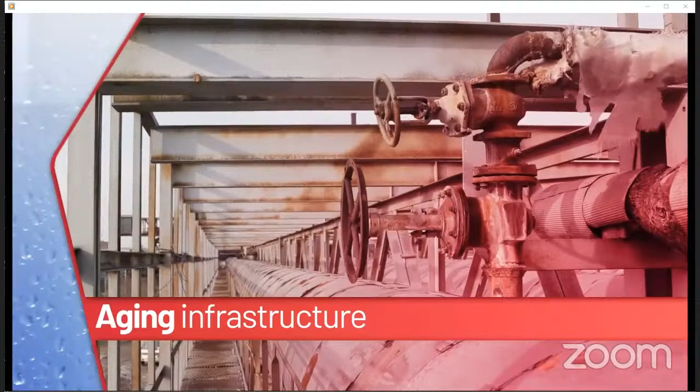The average utility loses 16% of its water supply annually. But that's just one of your challenges. Rising population is putting increasing demands on your utility's capacity limits. Extreme weather tests the resilience and sustainability of your system. Population growth and climate change escalate the importance of water preservation and reuse. Aging infrastructure is outpacing the available capital necessary to modernize your facilities. Experienced employees are retiring, leaving a knowledge gap in the workforce. Regulations are tightening. Entire systems are vulnerable to cybersecurity threats.

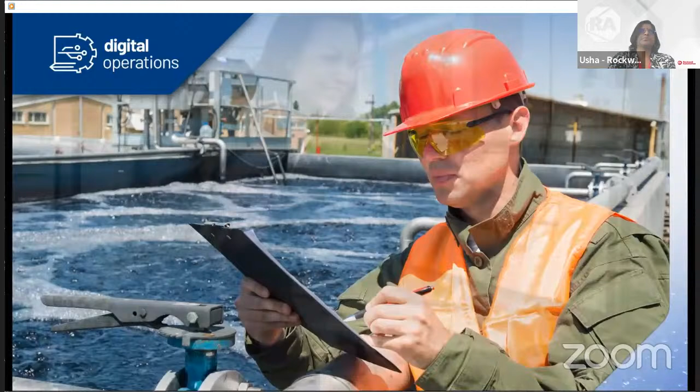Rockwell Automation offers smart water solutions to meet these challenges by providing expertise to spark a digital transformation that improves the operational facets of your water and wastewater systems, all built on a foundation of security. Better information leads to better decisions. By leveraging modern software tools and analytics, we create a digital solutions framework to allow more informed decision-making and improved performance. Bridging the gap between digital and physical assets, supporting the convergence of OT and IT, and fully integrating computerized maintenance management systems are critical to ensure system reliability and predictive maintenance.

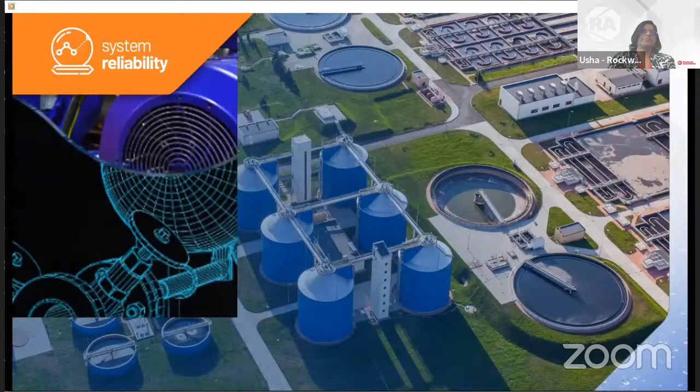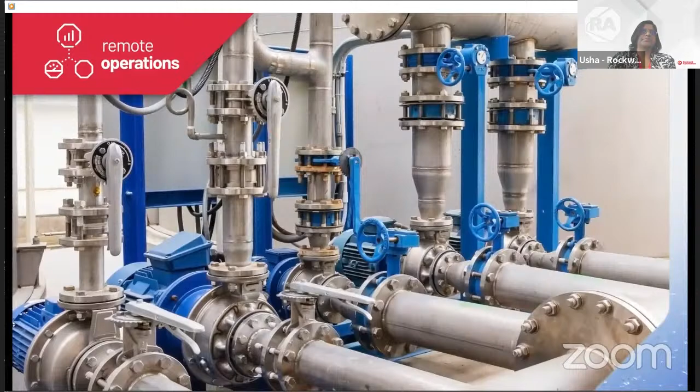Digital twins, augmented reality, and modern support centers simplify resource deployment and reduce the time to resolve critical issues. Whether it's tighter regulations, emergency response, or deploying the next generation of employees, the ability to remotely monitor and control equipment means better compliance and overall asset management. Smart water solutions from Rockwell Automation help our clients stay connected and informed about their infrastructure and regulatory obligations, their maintenance schedules, their networks and security, their operations team, their customers, and their future. Start your digital transformation today. Let smart water solutions from Rockwell Automation transform your water universe.

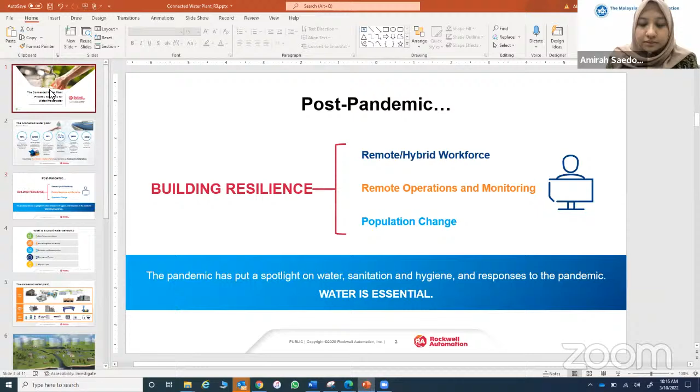Mr. Abhay, you're still on mute, yeah? Can you hear me? Yep, can hear you clear. Okay. Can you see me?

Are you able to see my screen? I'm able to see a screen currently. You are. Okay. All right.

So I think I'll go ahead and start. Good morning, everyone. Thank you, Usha, for the introduction. As Usha mentioned, I'm the industry sales manager for heavy industries within Asia Pacific for Rockwell Automation. It's a privilege to talk to you today, and thank you for allowing me to present our capabilities for the water and wastewater industry today. The objective over the next 50 minutes is to talk to you about some of the challenges that the water industry is facing and how Rockwell Automation as a company can support you to overcome these challenges.

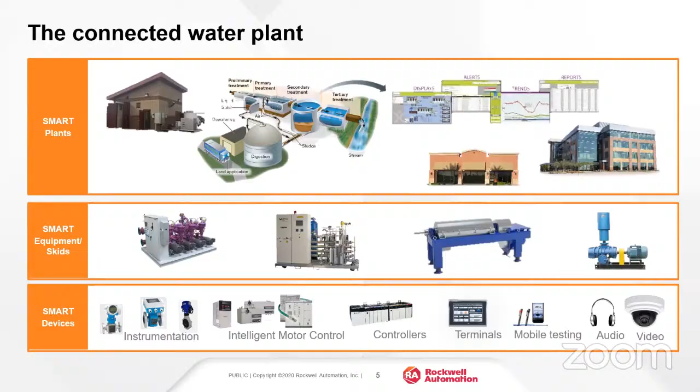So how does Rockwell Automation make it happen? This approach, which we call the connected water plant, and the various levels of technology take form in various applications in the water and wastewater industry spectrum.

Now, this can be an eye chart to many. However, it was a challenge to fit in all the applications that Rockwell Automation can support you as a customer within the water industry. So whether we are talking about intake or desalination, distribution or raw pumping, the concept of a connected water plant still holds value.

As these various agencies and firms address their role in this ecosystem, we strive to align our services and solutions as enablers for their digital transformation.

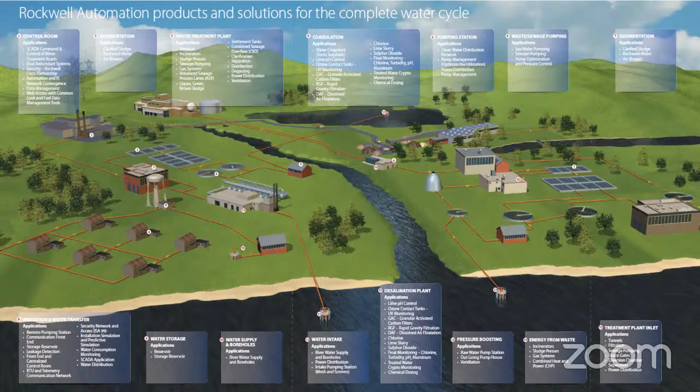Now, we transition from how to what, or rather, what are the areas for a connected water plant as examples of the journey towards a digital transformation. Basically, there are 4 aspects.

Number 1, operational intelligence, where we collect, aggregate, and display data across operations and ensure that there is data integrity for compliance and accurate decision making.

The second is intelligent asset optimization. Here we understand equipment performance and anticipate issues before they occur based on our smart solutions.

Third, we enhance workforce productivity with real-time information, remote collaboration, and expert capture, which helps you to reduce maintenance costs and predict failures so that operators can take corrective action.

And finally, scalable analytics, which helps you to optimize your process with our embedded artificial intelligence at the controller level.

Now, as you plan, design, and move through your journey towards creating a connected water plant, keep some guiding principles in mind. The best approach is open. Your connected water plant solutions should support not only your main automation vendor systems, but also the full range of third-party systems that you have in place or may someday use. Using open architecture technologies is the best way to do this.

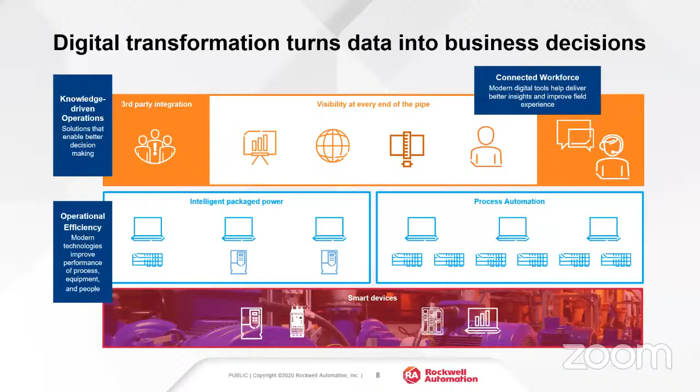And finally, the right partner is paramount. Choose a vendor with the right mix of project management, domain expertise, and industry experience to fit your needs. This is where Rockwell Automation can provide you that support with our knowledge-driven operations, providing you the digital tools to deliver better insights, and finally, providing you that operational efficiency with our technologies like Factory Talk Innovation Suite, we call it FTIS, which includes machine learning and artificial intelligence.

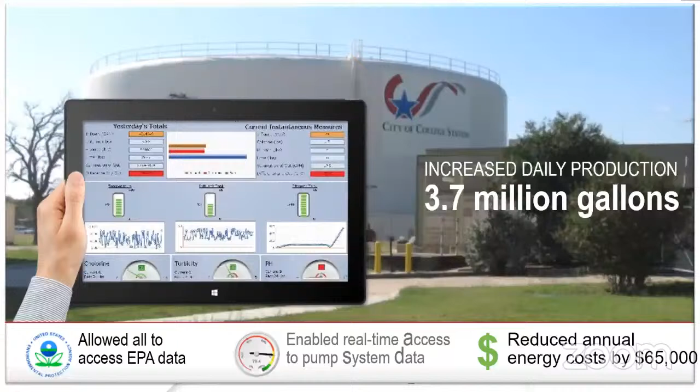Now I'll quickly go through an example of a solution we applied for what we call College Station located in Texas, which is basically a water plant. When you control a water or wastewater facility, the real-time data is manipulated in milliseconds, too much and too fast for human consumption. Process parameters change on the fly, so aggregation and context for complex data is critical for rapid decision-making by operators and managers.

Through integrated control and information systems, we are turning data into actionable information for improved decision-making. This customer integrates their data for continuous improvements in many ways, using Rockwell Automation software solutions to do it. Data from process systems and reporting systems are given context and then aggregated to provide plant-wide insights.

Employing these principles, the city was able to produce close to about 8.1 million gallons per day up to about 11.8 million gallons. In addition, with better visibility, the city was able to save over $65,000.

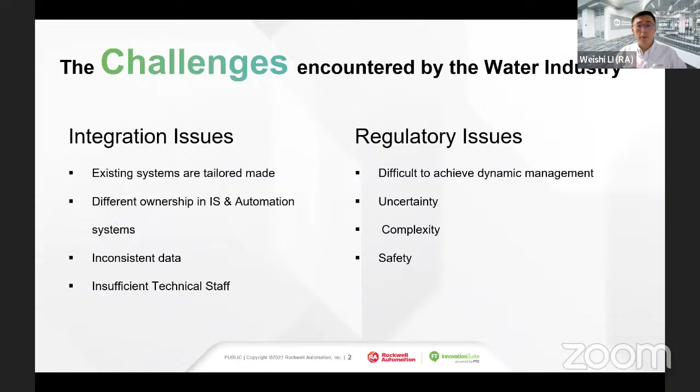So let me share with you some examples of smart water. We're looking to have less human involvement, which is having unmanned water plant operations. We're also looking to optimize energy consumption, reduce chemical usage in the dosing process, reduce fluctuation in the water distribution network, resolve the shortage of experienced operators, and be able to comply with compliance requirements by industry as well as government regulations.

We want to be able to have information readily available, for example, generating reports on the fly. Lastly, to be able to continue to look for ways to optimize operation processes. So how do we do that? We will need to go back to the basics.

Before I jump to the solution we offer, I would like to briefly explain what digital transformation is, and maybe share a chart you can take a look at to find out where you are today in this transformation journey. First of all, I need to stress that this is a strategy or a process, it is not a project or a system. It is a strategy for changing the way water operators work, and it all starts with admitting there is a problem.

So what's the problem? We can't, or we did not, operate and make decisions with real-time data and information. What we are trying to achieve here in digital transformation is to be connected.

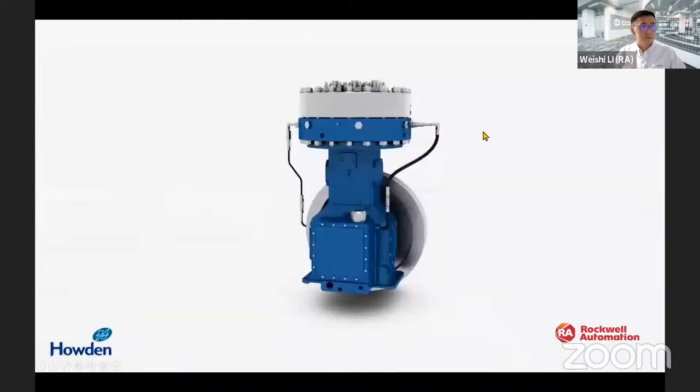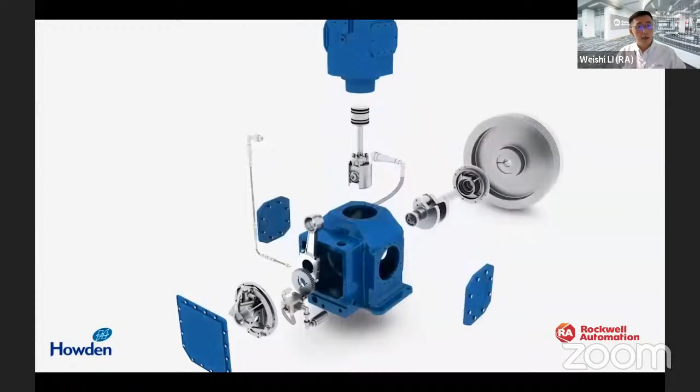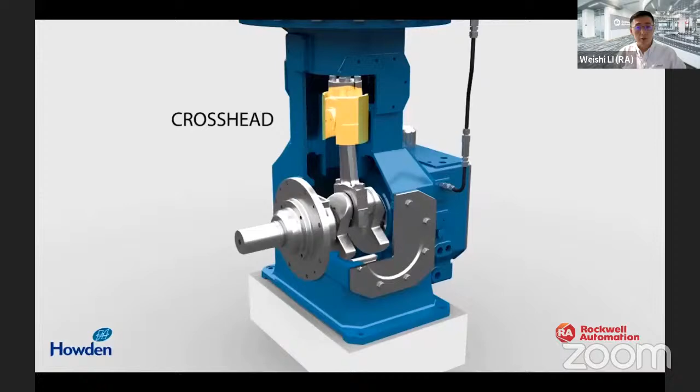In wastewater treatment operations, diaphragm compressors are often used to convert low pressure gas or liquid to high pressure through a flexible membrane. In our case, the compressor injects oxygen into the sedimentation tank to accelerate the microbial sedimentation process. But when the compressor goes offline, it is critical to diagnose and service it as quickly as possible to avoid costly repercussions and keep the plant running at full capacity.

Therefore, it is crucial to provide tools to effectively and efficiently perform field services. Through our role-based dashboard, monitoring a fleet of assets deployed at different sites worldwide, we provide real-time data to technicians who want to stay ahead of equipment outages.

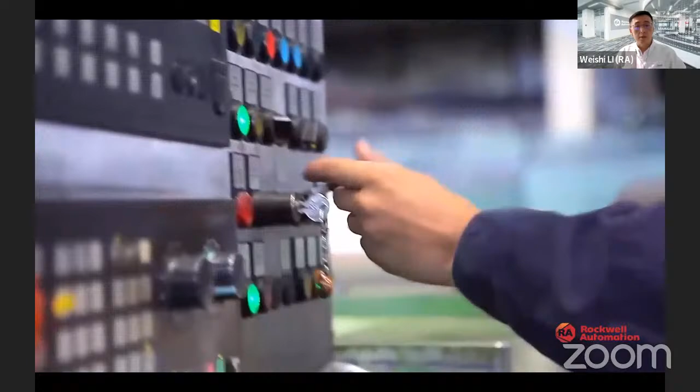Next scenario will be showing how a maintenance manager can have an overview of the assets across the plants and get alerts from predictive analytics, suggesting the next action to be taken.

With this general view of assets, information like model, serial numbers, locations, performance, sensor data, and maintenance log, predictive analytics are all in one place. We can select diaphragm number 1 to see its performance, status, and historical data over time. Although the asset is showing as good, however, our predictive services is predicting abnormal activities.

For more details, we can zoom into the pump, where we can see the reading of the compressor. There are no active alerts from the machine. However, there's a predictive alert for the pressure leak, which has been flagged by the system.

So it is provided by the prediction model for those critical equipments. So looking at the low pressure and the flow rates, we can investigate the predicted failure and determine that the compressor is trending towards a diaphragm rupture.

The next scenario shows how teams can communicate within a single platform to get alerts across. So the best course of action is to deploy a field technician to replace the physical part. The system led us to create a service ticket to dispatch a technician with information needed to resolve the problem.

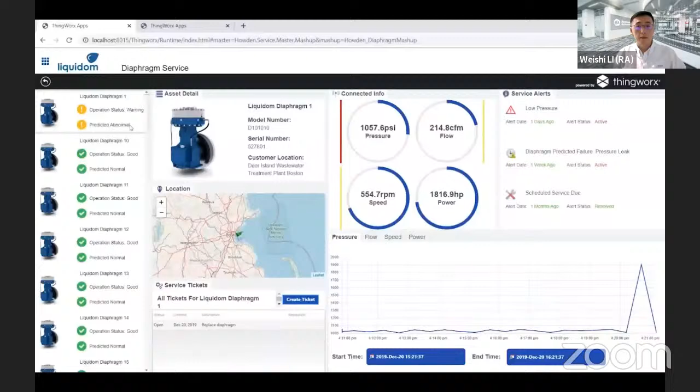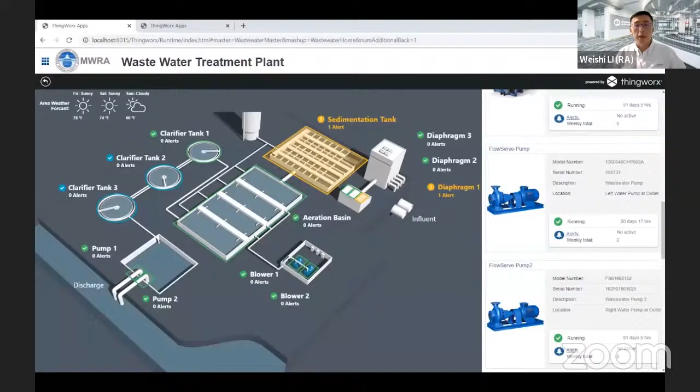Next, we will demo how a plant manager is able to oversee its overall plant assets and processes all at its fingertips. With connectivity provided, real-time data is brought to the forefront of the service operations. On a macro level, the same real-time data acquisition and machine learning can also be applied to an entire enterprise.

For a plant manager, monitoring a fleet of different assets and processes can be complicated and overwhelming. With compressors, blowers, pumps, managers must ensure all assets are in the right conditions to prevent unplanned downtimes. The plant manager can see all individual assets with performance and alert status.

But the plant manager must need to know more than that. They also need to know the status of the entire plant process. To monitor the entire plant performance, our system provides an operational overview of a plant in this demo.

From the intake of raw water to the sedimentation and aeration process through these 3 clarification tanks at the top to the eventual discharge of the treated water. Machine performance and the data, the sensor data tracking can trigger alerts and notifications through the entire sanitation process.

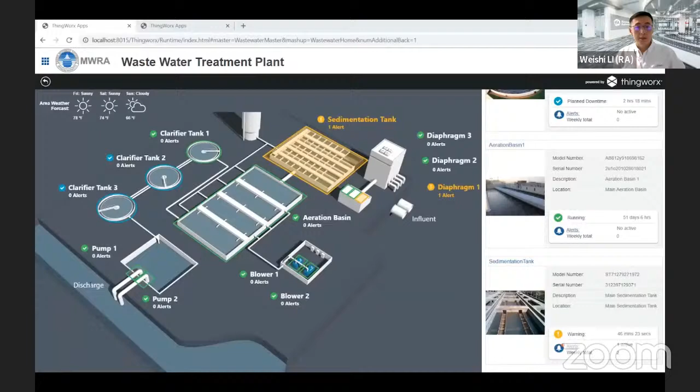Next, we can see how a site maintenance team does a review before deploying the service technician to perform his task.

In this scenario, the site maintenance team received the alert from HQ. In order to understand the issue better, they can select the alert notification from diaphragm number 1 to view alert details and the compressor alert history.

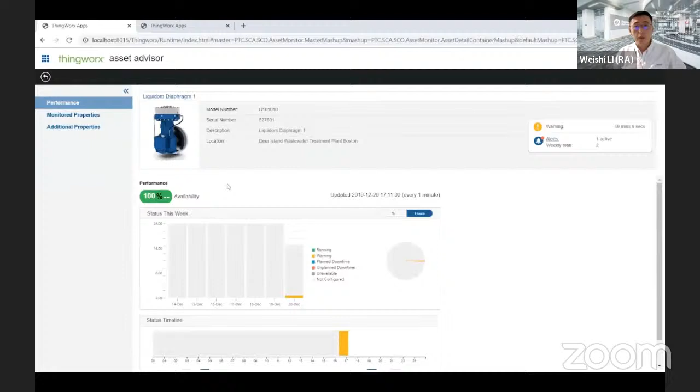We can view diaphragm number 1's details to examine the changes in the recorded pressure. The alert details reveal low pressure from the compressor, which indicated we have a damage in the diaphragm.

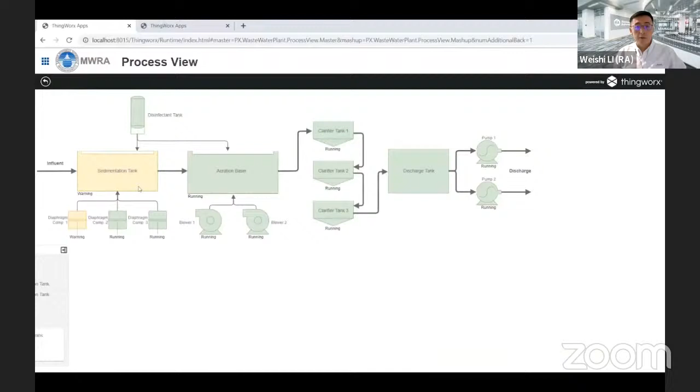In addition to seeing the implication on the asset level, we can also see the damaged diaphragm is affecting other processes. From the process view, we can see both diaphragm number 1 and the sedimentation tank need our attention.

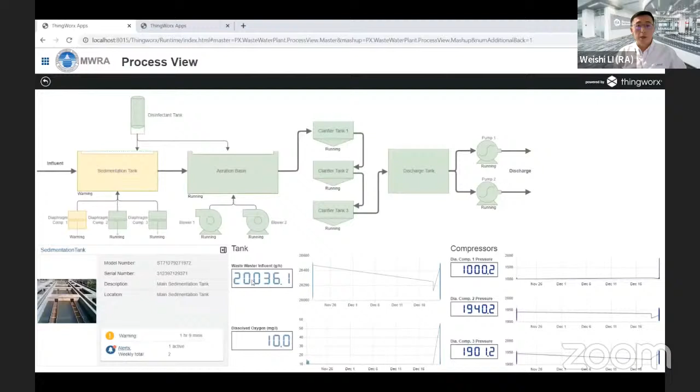We have also seen the low pressure from the compressor, but we need to understand the issue in the sedimentation tank. Selecting the sedimentation tank shows the dissolved oxygen level is decreasing because the compressor is operating below spec. This impacts the biological components process, which in turn slows the sanitation process, ultimately impacting our ability to achieve KPI at the plant.

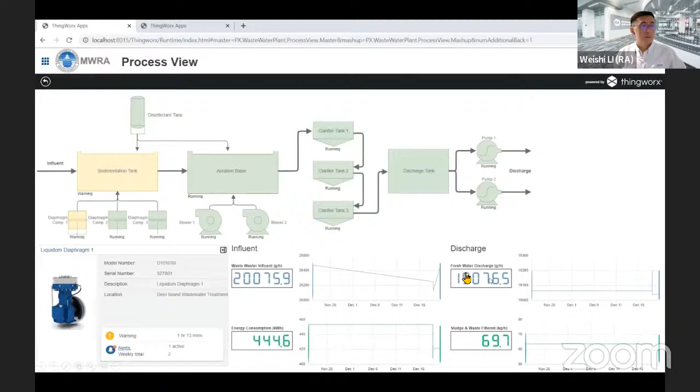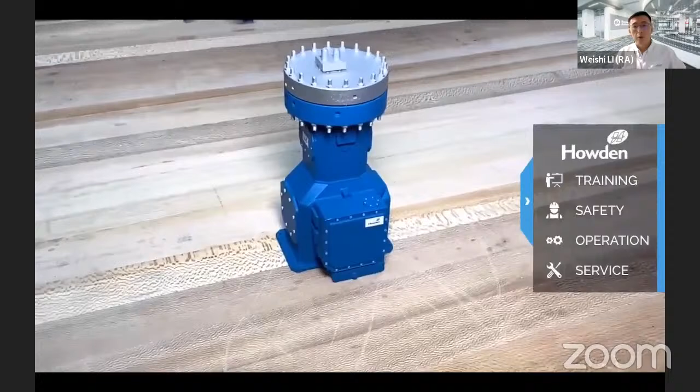Lastly, we will take a look at how our field technicians prepare and perform their tasks to ensure first time right. Ensuring the service technician has sufficient knowledge required to perform his task with augmented reality.

The service technician has the in-depth knowledge and dynamic asset information they need to quickly understand, diagnose, and service the asset, all from his mobile device.

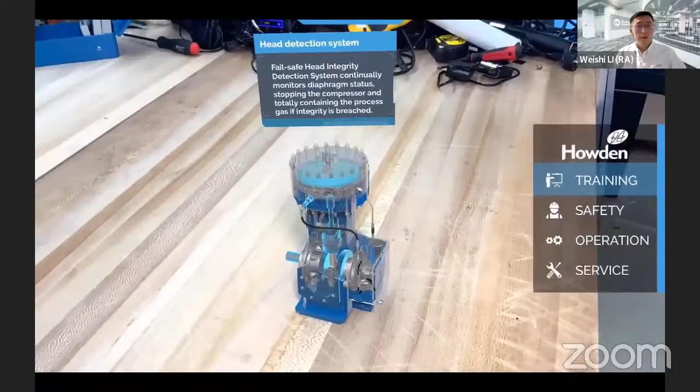In this demo scenario, to fix a diaphragm compressor, we can prepare and review relevant training, safety instructions, and simulation while simultaneously working. With the ability to explore components, we can have insight into a part's name, ID, etc., to ensure replacement parts are ordered correctly.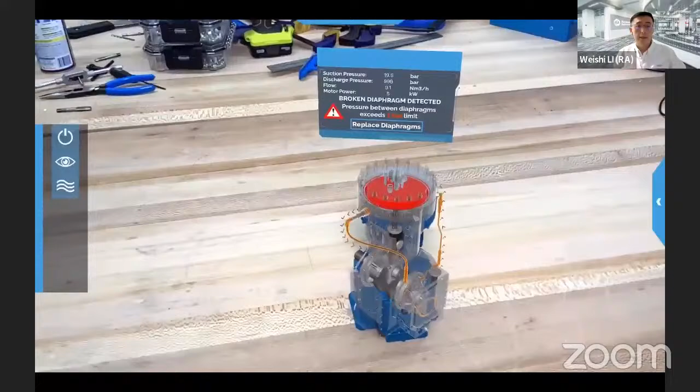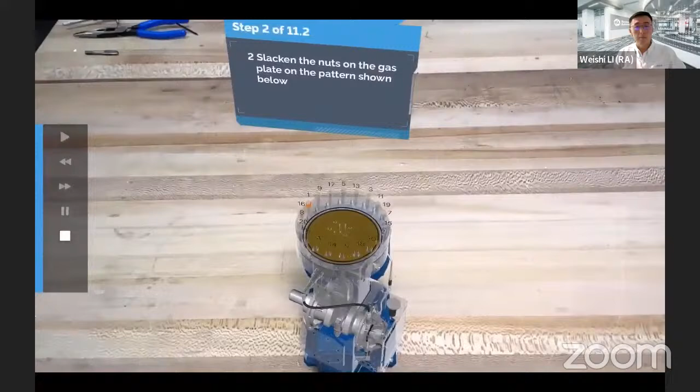Once the technician knows how the compressor works, we can walk through the 3D digital instruction overlay on the real world compressor to fix the asset. All this technology helps the technician equip the knowledge and improve the first time fixing rate, reducing the downtime.

So are you ready to see the difference our solution can make at your plant? As next step, we can schedule a discovery workshop to interview your team to understand current challenges, define key project objectives, identify the most urgent valuable area of improvement in your operations, develop a business case, and expect ROIs. Please feel free to contact us if you have any questions regarding digital transformation or anything that we can assist you on.

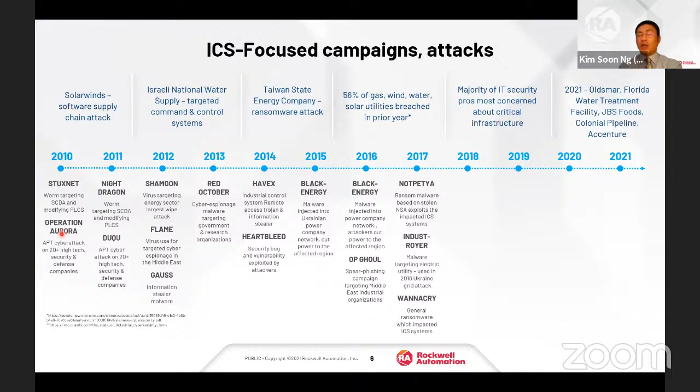And of course, you heard about WannaCry, where quite a lot of major shipping operators and utilities were affected. Come 2018, oil and gas became the major target, especially in Southeast Europe.

In 2019, it became more and more apparent with ransomware. Ransomware is all about monetary gain. We have actually worked with a lot of customers who were hit by ransomware, where the whole industrial control system was out of control.

That leads to a lot of risk, but worst of all, it becomes very bad publicity in the media. In 2020, again they attacked the ICS. Now, the latest one was 2021, especially the Florida water treatment plant.

The thing is, a lot of their systems have very poor passwords. A lot of them share passwords around, and use outdated operating systems - some of them are still using Windows XP, which is not supported, and it's opened up to a lot of cybersecurity breach vulnerability. Now, what is at risk?

Number one, loss of life - as you know, in industrial control systems, safety is paramount. Number two, stolen intellectual property. This is the most common objective because they want to steal your information, your plans, your marketing plans, and so on.

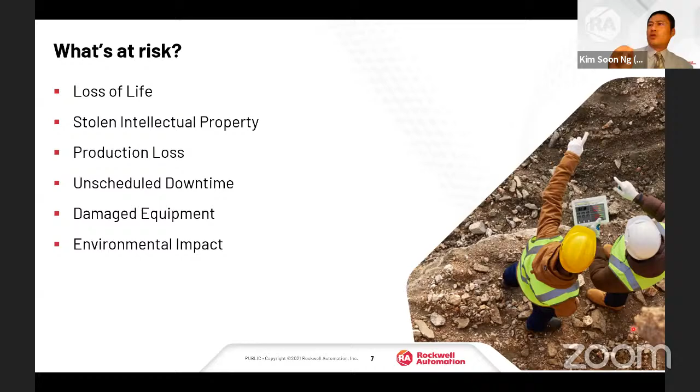But in all cases, once the cyber criminal gets your money, they just leave you in the lurch. They don't care about environmental impact. This cyber criminal has malicious intention, they want to create as much damage as possible so that you will be at their mercy. Now, what are we trying to say?